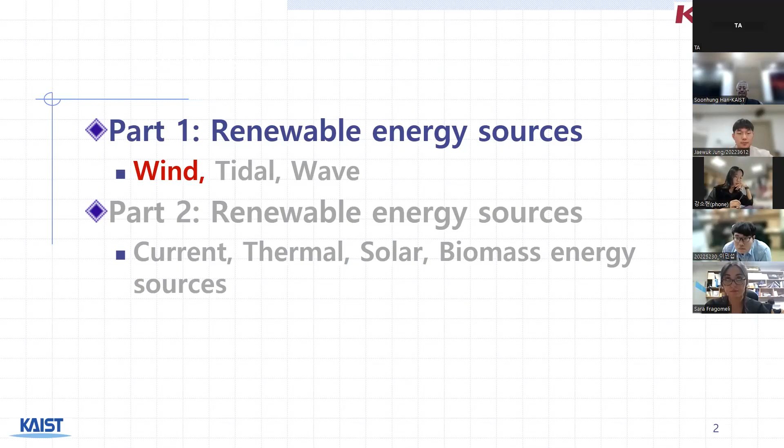We will start from the definition of renewable energy. Renewable energy is energy that is collected from renewable resources. Renewable resources are energy that is naturally replenished on a human timescale. Examples of these renewable energies are sunlight, wind, rain, ocean tides, and so on.

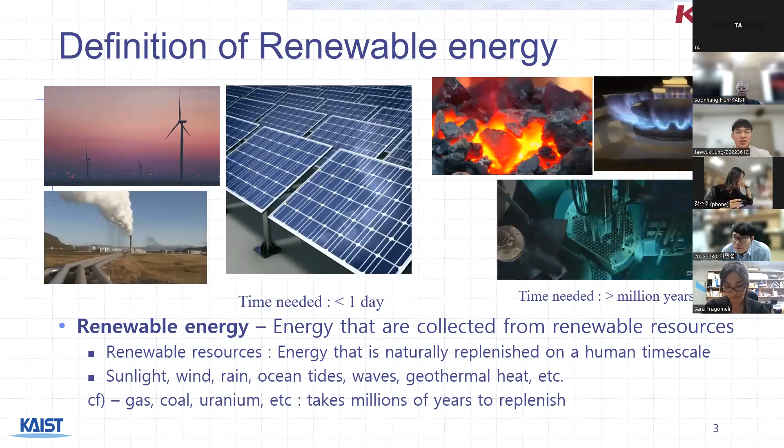For example, for wind energy and solar energy, the energy is replenished within a day normally. For geothermal energy, the energy is usually constant, so it never runs out in a short time frame. On the contrary, there is non-renewable energy, which is energy that is not replenished within a human timescale. For example, coal, gas, and uranium do not replenish on a human timescale.

So where does wind energy get its energy from? The answer is our sun.

Oh, we lost the connection. It's coming again. No. We can wait a little bit for the reconnection. It's coming. Can you hear me? Yes, we can hear you. Sorry, my internet connection is not stable, so I will keep going.

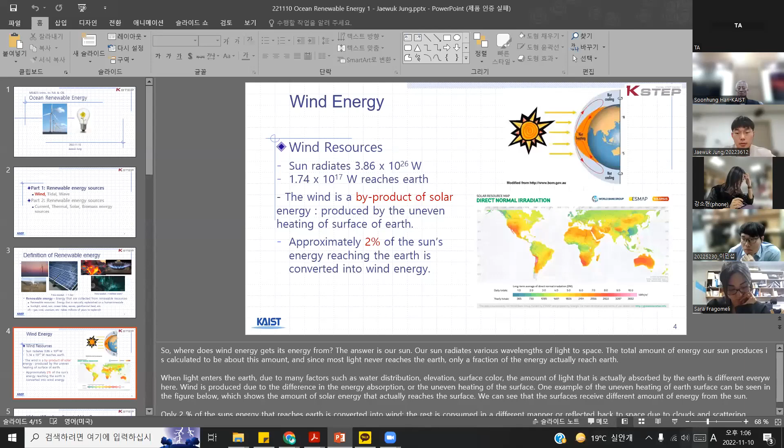To start again: our sun radiates a lot of energy into space. The exact amount of energy it radiates throughout space is calculated to be about 3.86 times 10 to the 26 watts, which is a lot. But most of the energy is radiated in other directions rather than toward Earth, so the exact amount that actually reaches Earth is only about 1.74 times 10 to the 17 watts.

But due to the distribution of water or elevation on the terrain, not all surfaces on Earth are evenly heated. You can see in this figure on the bottom right, this is a map of the direct normal irradiation of the Earth's surface. Due to these various factors, the surface of the Earth is heated differently, and this temperature difference causes the wind.

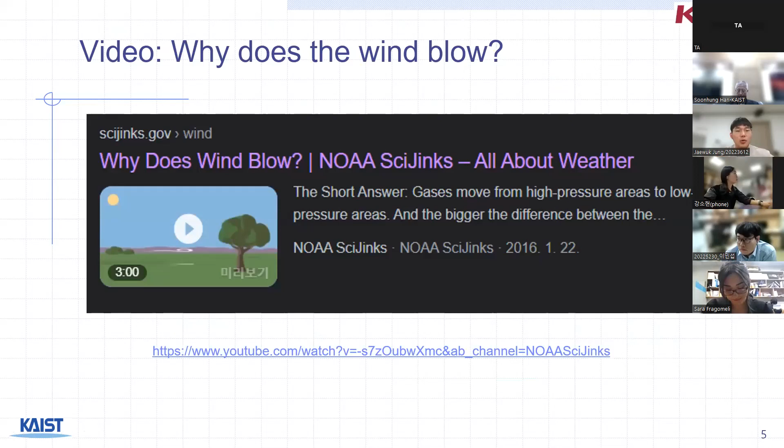So we will watch a short video explaining why and the mechanisms of how the wind blows.

Jaewuk, the sound is not coming. You need to share the sound option. Can you go out and unshare and share again using the audio option checkbox? Can you hear this?

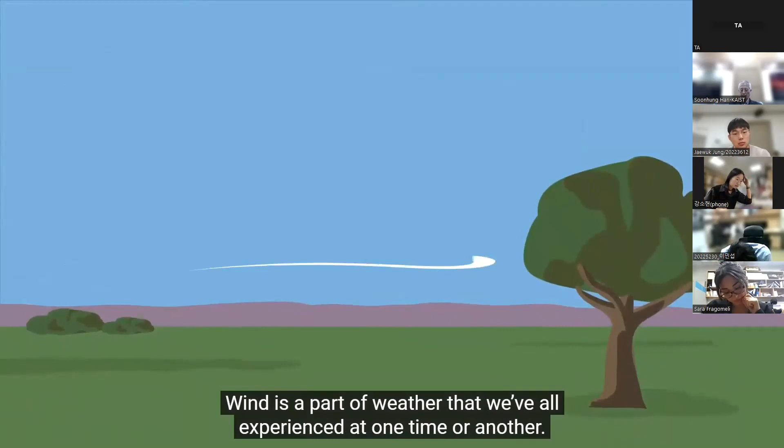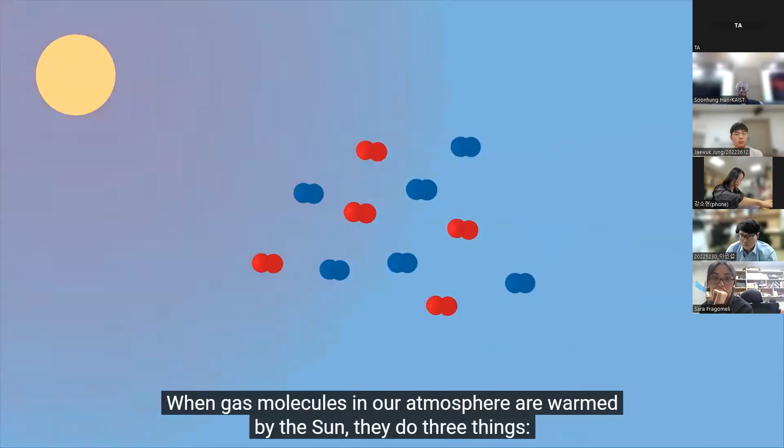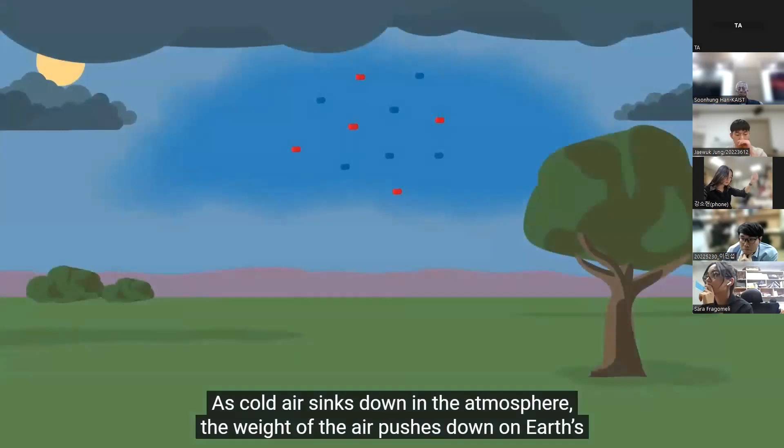Why does the wind blow? Wind is part of weather that we've all experienced at one time or another. Whether it's a welcome breeze on a hot day or a destructive gust during a storm, it all starts in the same way: differences in air pressure. Air is a mixture of gases in Earth's atmosphere. The weight of these gases pushes down on Earth, creating air pressure. How does air pressure cause wind? Wind is caused by differences in air pressure, and temperature can affect these differences. Gases are made up of tiny particles called molecules. When gas molecules in our atmosphere are warmed by the sun, they do three things: the molecules move quickly, they spread out, and they rise up. As warm air rises into the atmosphere, it isn't pushing down on Earth quite as much. This creates an area of low air pressure. When gas molecules are cold, they do the opposite: they slow down, move closer together, and sink. As cold air sinks in the atmosphere, the weight of the air pushes down on Earth's surface a bit harder. This creates an area of high air pressure. The sun doesn't heat all of Earth equally, so there are high pressure areas and low pressure areas all over the planet. In general, air always flows from an area of high pressure to low pressure. So cool air in high pressure areas will rush into the low pressure area created by rising warm air. This rushing air is called wind. Why is some wind a gentle breeze while other wind is a strong gust? The strength of the wind depends...

Okay, so this is the end of the first video.

The supply of wind energy is relatively stable compared to solar energy, and it is very abundant compared to other sources, which I will show you in the next slide. Thanks to these advantages compared to other methods, wind power technology is developed and installed more every day.

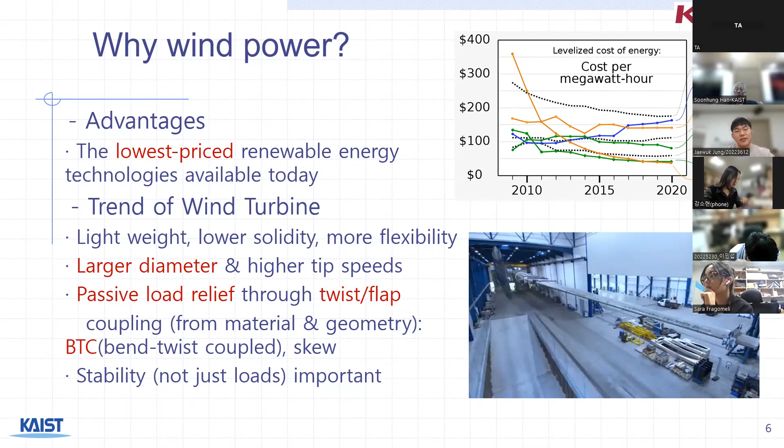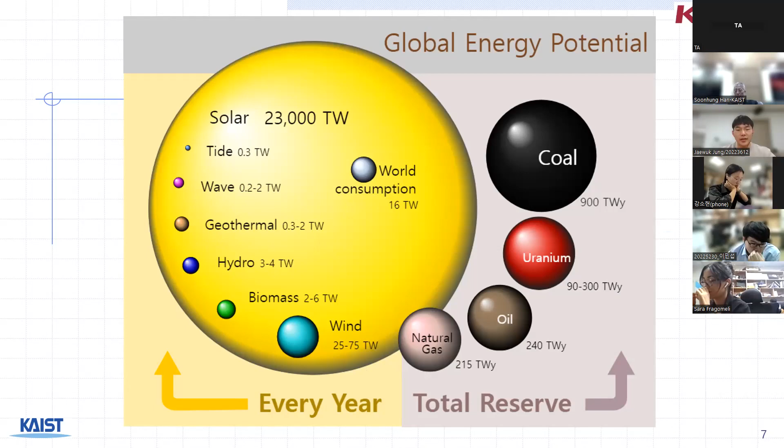Because of the abundance and advantages I just mentioned, lots of countries, including Korea, are utilizing wind power to power their power grids.

Korea actually has a lot of wind resources too. The average wind speed of Korean onshore and offshore areas is about 7 meters per second, and there are lots of wind power stations throughout Korea, as you can see on the figure on the right. All of the power generation capacity in Korea adds up to about 1.6 gigawatts currently.

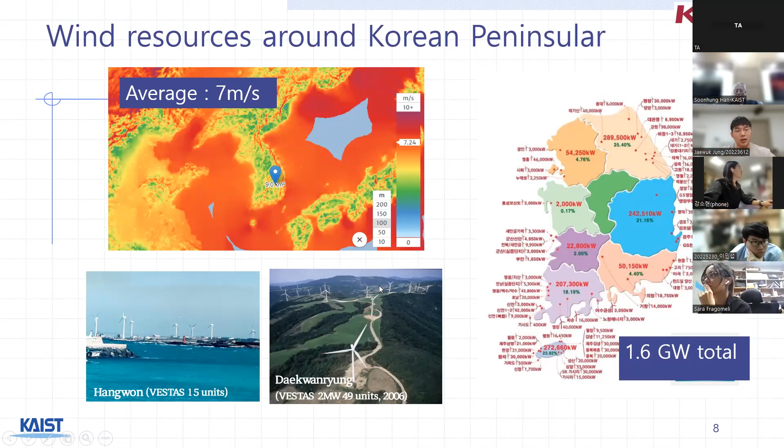These figures on the bottom left are examples of wind farms currently installed in Korea.

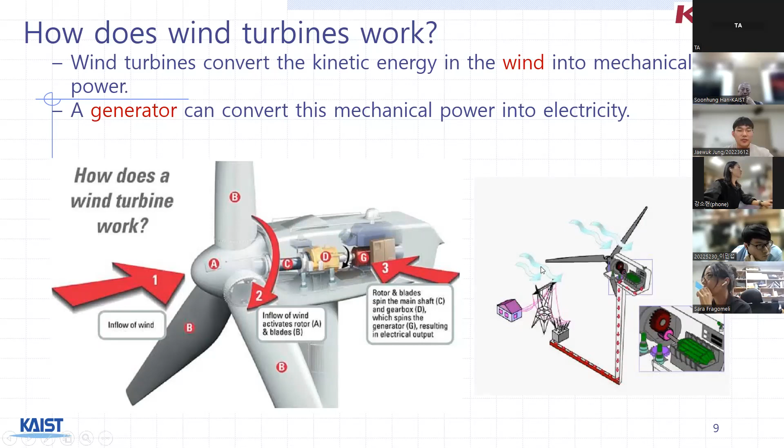So how do wind turbines work? Wind turbines are simply devices that convert the kinetic energy in the wind into mechanical power, or more precisely, electrical energy. The blade of a wind turbine turns kinetic energy into rotational mechanical energy, and this rotational energy is converted into electrical energy via the generator. When energy is produced, it is transmitted to households near the wind farm, as shown in the figure on the right.

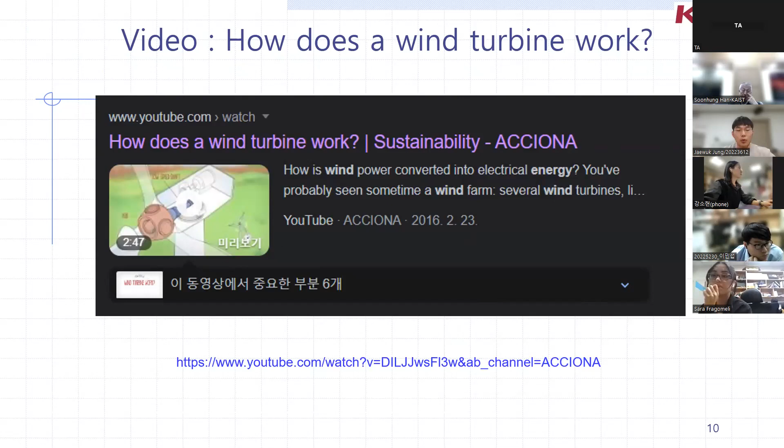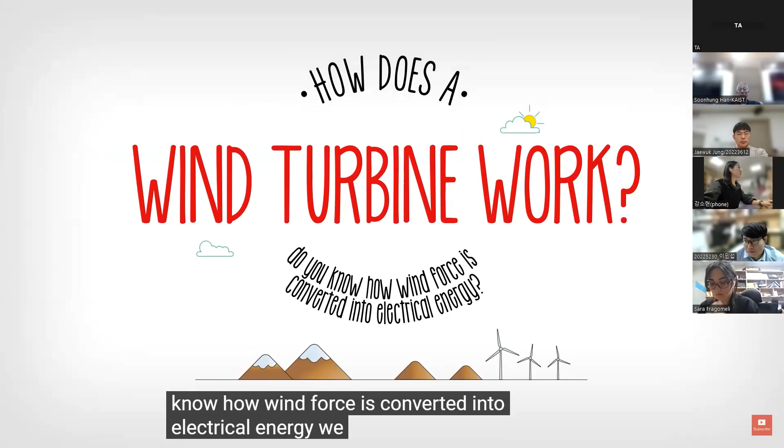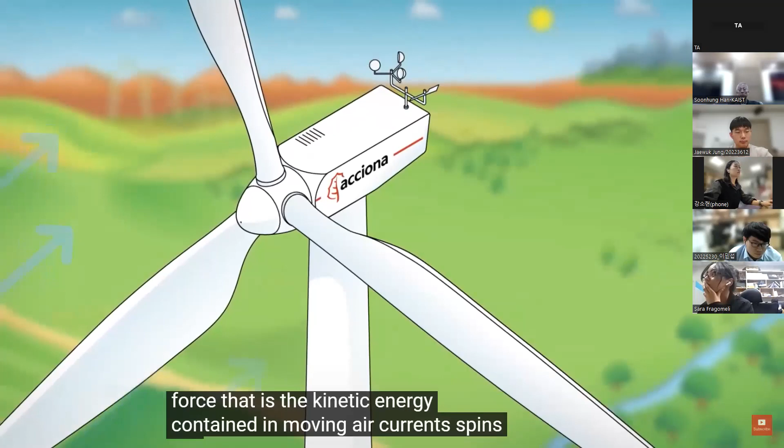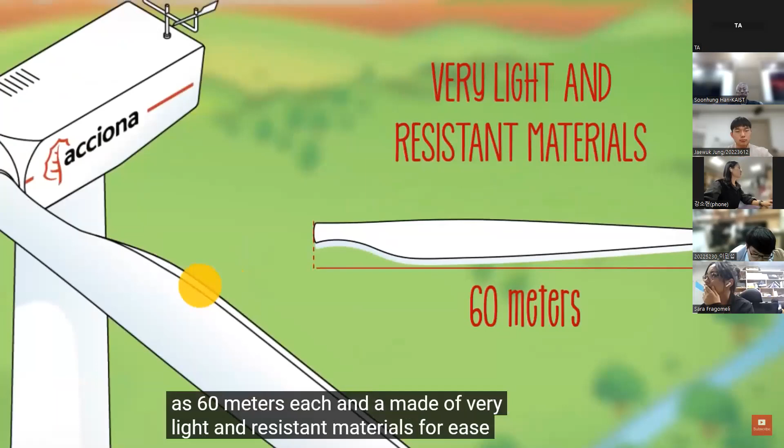We are going to show you how a wind turbine works. Each wind turbine has a wind vane at the top that indicates the wind direction, allowing the turbine to rotate on the tower and face the wind. The blades also rotate on their axis for maximum resistance. Wind force, the kinetic energy contained in moving air currents, spins the blades, which are designed to fully capture its energy. They can be as long as 60 meters each and are made of very light and resistant materials for ease of movement. This is why they can produce energy even with very light winds, starting from about 11 kilometers per hour. With very strong winds above 90 kilometers per hour, the blades are placed in the feathered position and the turbine stops spinning for safety reasons.

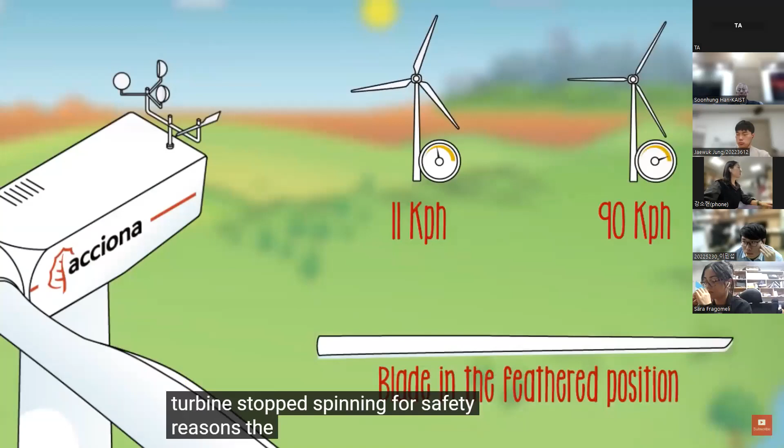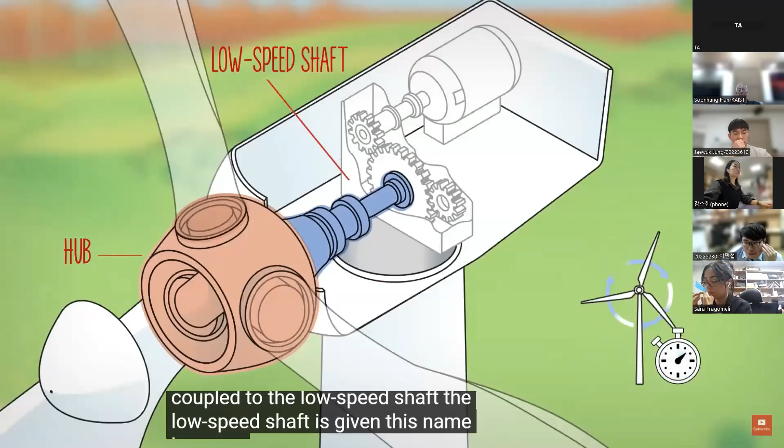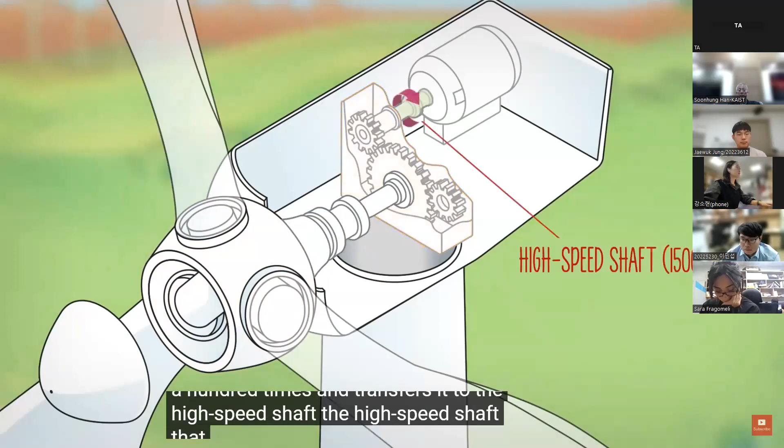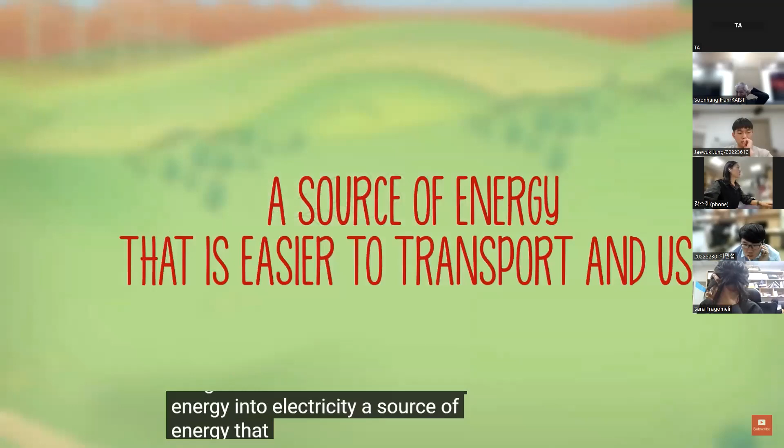The blades are attached to the wind turbine through the hub, which is coupled to the low-speed shaft. The low-speed shaft is named this way because it spins at the same speed as the blades, between 7 and 12 revolutions per minute. To produce electricity, it is necessary to increase the turning speed of the low-speed shaft. That is the mission of the gearbox, which raises the speed over 100 times and transfers it to the high-speed shaft. The high-speed shaft, which rotates at up to 1500 revolutions per minute, is connected to a generator. The generator converts the kinetic energy into electricity, a source of energy that is easier to transport and use.

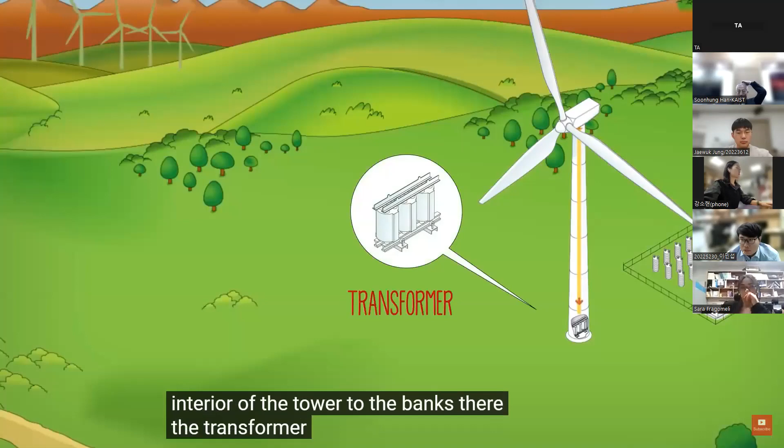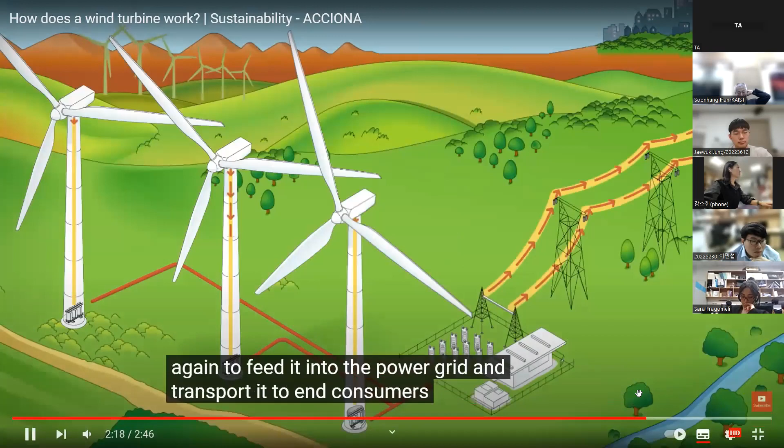The electricity produced in the generator is conducted through the interior of the tower to the base. There, a transformer raises the voltage for transport inside the wind farm. From each turbine, alternating current is sent to the substation through underground cables. Here, the voltage is increased again to feed it into the power grid and transport it to end consumers. This is how we use the wind to light cities, feed industries, schools, hospitals, or operate our household appliances.

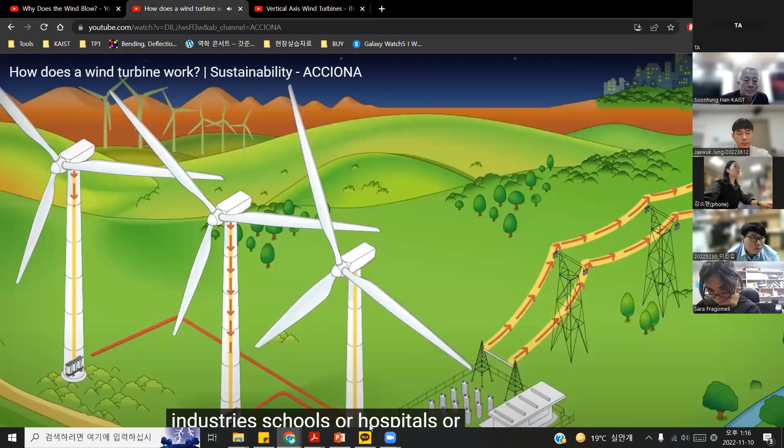So we watched the video on how wind turbines work. Next we will talk about the types of wind turbines, the two main types. There are two types of wind turbines: vertical axis wind turbines and horizontal axis wind turbines. A horizontal axis wind turbine is one where the rotation axis for the blades is parallel to the ground. This is the type we know best.

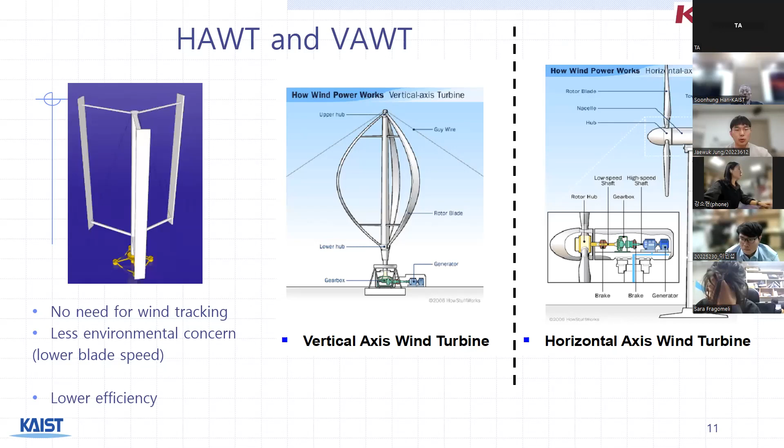The second type is the vertical axis wind turbine. Contrary to horizontal axis turbines, they have a rotation axis that is perpendicular to the ground, not parallel. Due to these characteristics, there are several advantages and disadvantages for vertical axis wind turbines compared to horizontal ones. The main advantage is that since the rotation axis is vertical, there is no need for wind tracking. Also, since the blade speeds tend to be lower than horizontal axis wind turbines, they cause less noise and fewer environmental concerns. The main disadvantage is that they have lower efficiency because, as I said, they rotate at a slower velocity than their horizontal counterparts.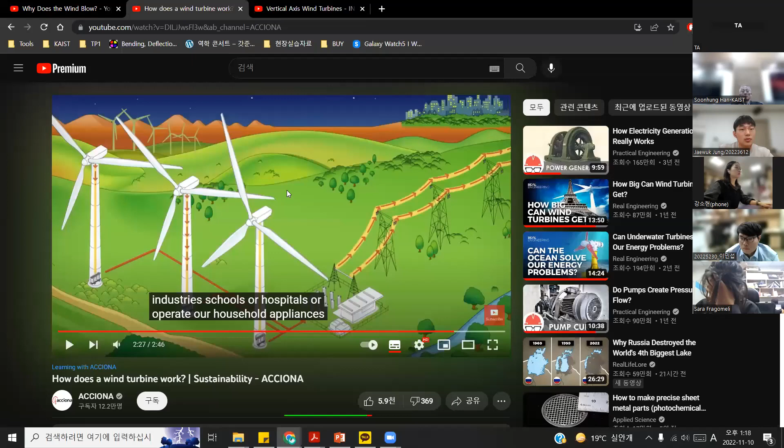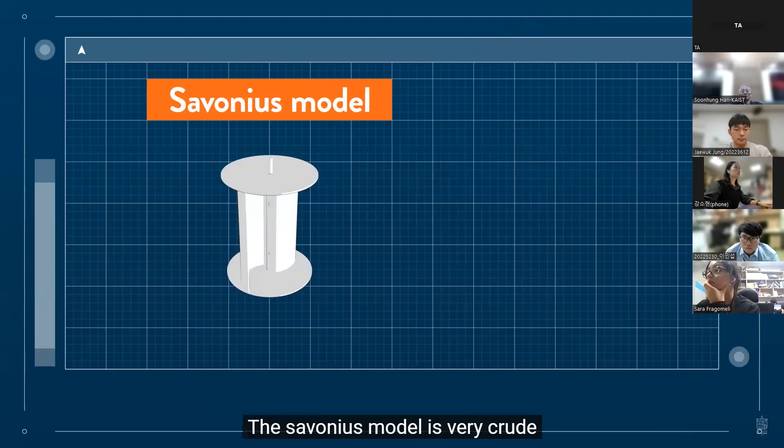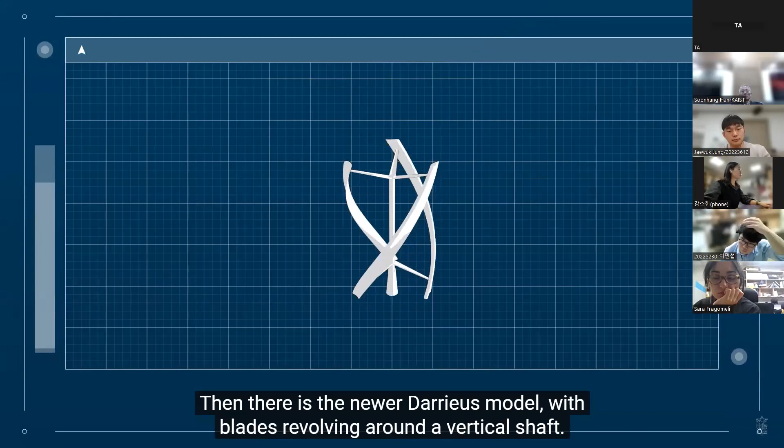What to choose? Vertical or horizontal axis turbines? When you imagine a wind turbine, you probably think of something like this. But there are other designs out there, like the vertical axis wind turbine, or VAWT for short. The Savonius model is very crude and was already used by the Persians 3,500 years ago. Then there is the Darrieus model, with blades revolving around a vertical shaft. Each blade gets hit by the wind at a different angle. They make use of an airfoil design, so they generate lift to make the turbine rotate.

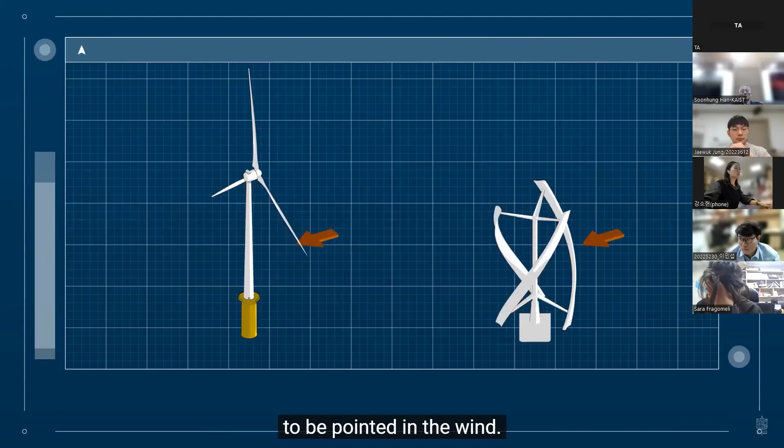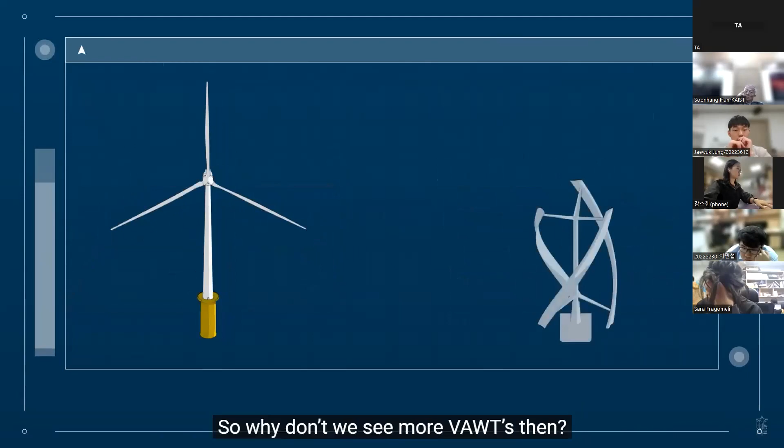A generator at the bottom of the structure converts the kinetic energy into electricity. VAWTs are omnidirectional; they do not need a yaw mechanism to be pointed into the wind. Also, compared to horizontal turbines, VAWTs can be grouped closer together, because they can operate in turbulent and gusty wind. So why don't we see more VAWTs then? Well, VAWTs tend to be less reliable and less efficient than horizontal turbines. This makes them less suited for large-scale energy production. But the field is still under development, so who knows?

We hope you enjoyed this short lecture.

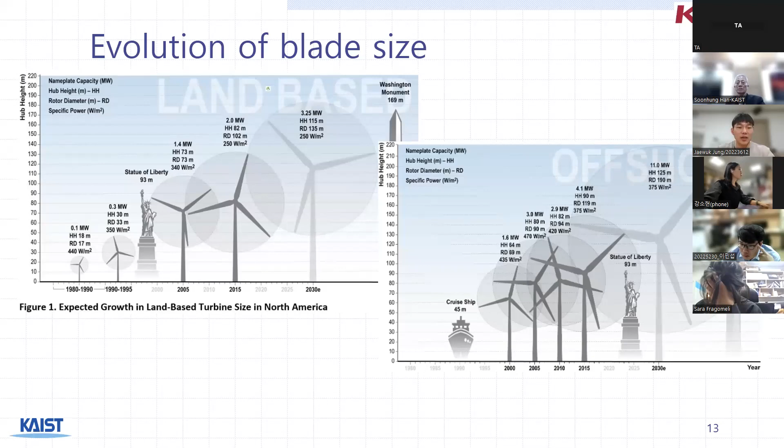The final thing I want to mention in this lecture is the general evolution of blade size and power production capacity of a single wind turbine. As you can see in the figure, compared to the past, wind turbines are getting larger and larger as time passes. We also see that generally offshore wind turbines are much larger and have a higher power production capacity than land-based turbines. In the figure, we can see that currently an average land-based wind turbine has a power production capacity of 2 megawatts and a rotor diameter of about 100 meters.